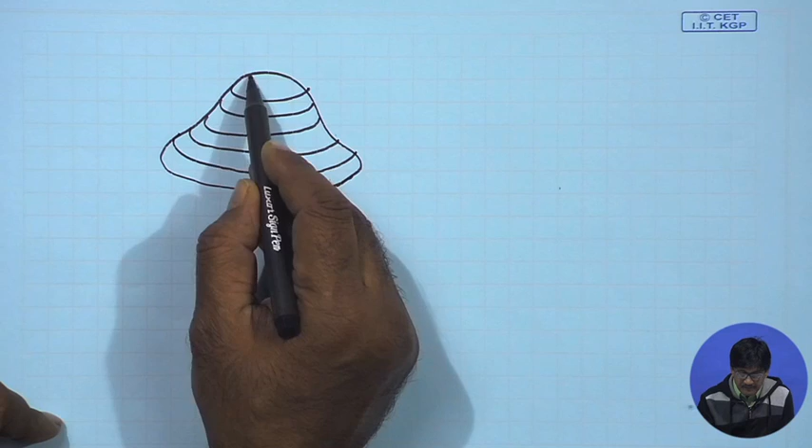So, I will be cutting it into layers. I mean, I will make a CAD model and I will cut it into layers, and then I will be forming. I will be trying to physically realize these layers and stick them together and get this job.

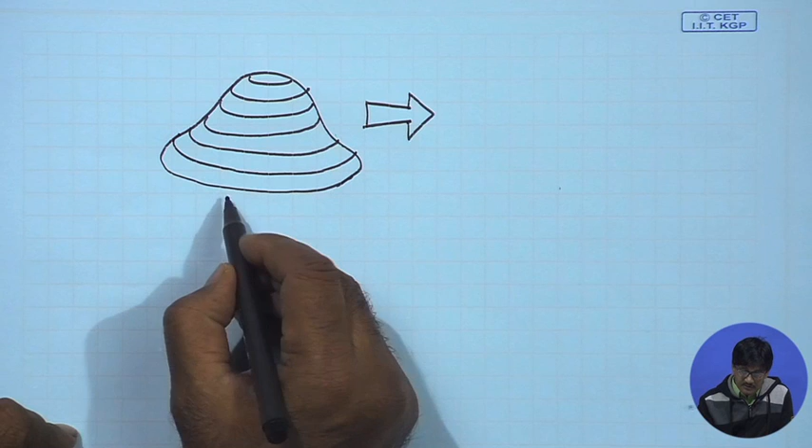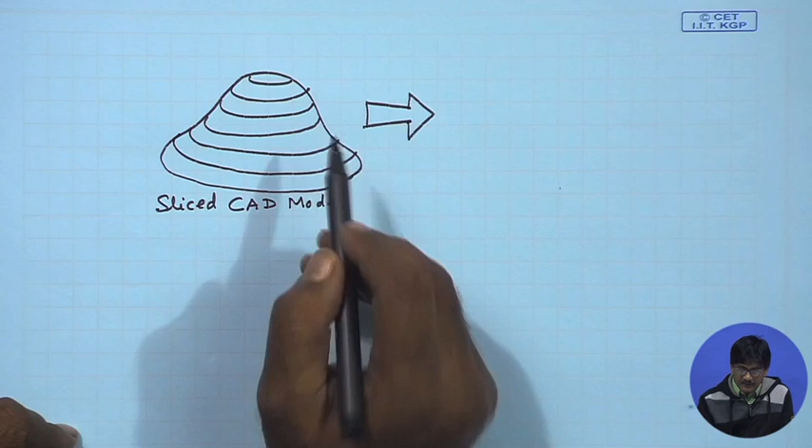So, this is virtual CAD model. I will slice it. So, sliced CAD model. These slices I now try to realize physically. How can I do it? Generally, when they are realized, they come with an approximation. What is that? That is called zero order approximation.

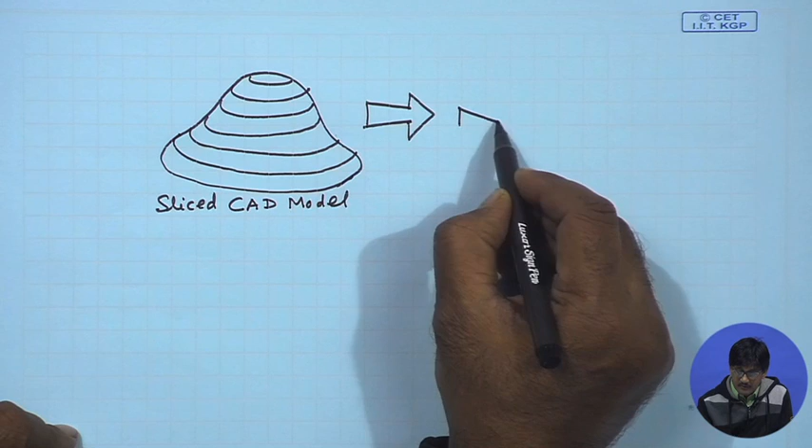Some cutter has been used to cut this out of a sheet of material or a plate of material. It looks like this. Now, you can immediately point out two defects here. One is that these are straight cuts, okay, that really cannot be avoided in case of CNC technology. Straight cuts, most of them. You might be able to remove some of them by curvilinear paths if they match, but some sort of approximation has to be tolerated.

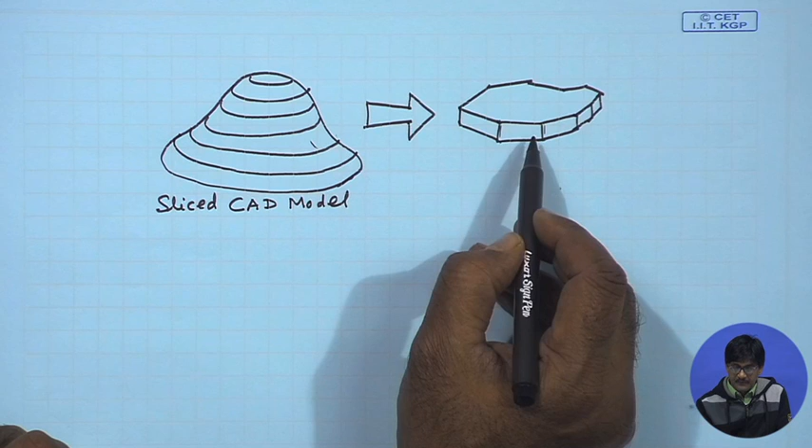But yet another tolerance which we are seeing here is that these walls are vertical while these walls are inclined, inclined and curved, and these are straight and vertical. If we have a 5-axis water jet cutter, in that case we can develop something of this type. These will still perhaps be straight, but these can be inclined. So, water jet cutting will allow us to cut this sort of a layer in which we are simply using a 5-axis water jet cutter.

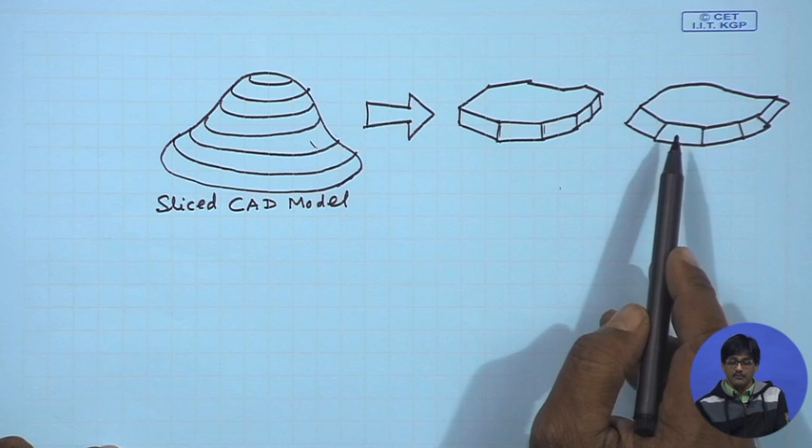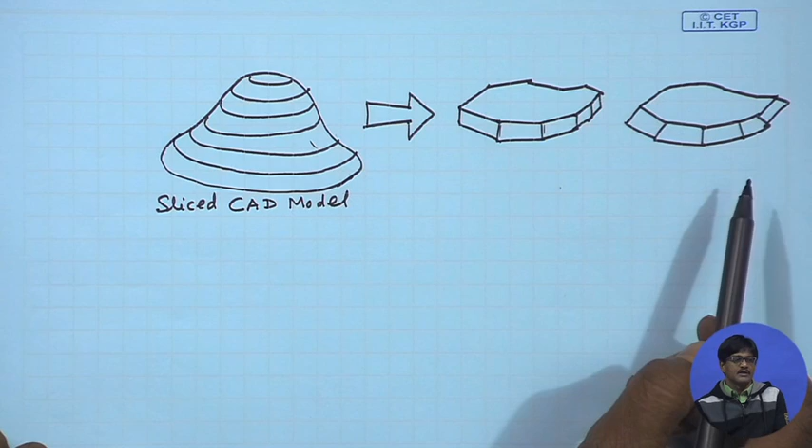Of course, in the same way we can use other cutting heads like laser cutter. And if technology is good enough, we can use a wire EDM also. But these cutting technologies, abrasive water jet cutting, proves to be a very good member in this particular group. So, in the same way, profiled edge lamination tooling, we can also employ a water jet cutting device in order to realize these layers. So, this is by way of application. There are other applications also. We will be going through a detailed discussion on the applications later on.

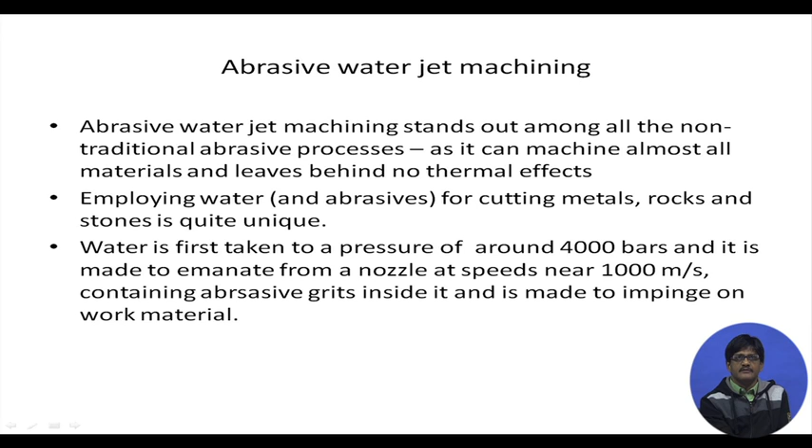Let us have a look at the machine. What does the machine consist of? First of all, it is understood that we have to develop a very high pressure of water. 4,000 bars is really not a very low pressure indeed. So, we pump and intensify the water to a very high pressure. How we do it, we are going to come in the next slide, but let us first try to understand the overall idea. Once we have developed the pressure, we accumulate the water at a very high pressure to remove pulsations in the pressure.

That means, if we are using say a reciprocating device, this reciprocating device will develop the pressure, recede, develop the pressure, so on and so forth. So, that there will be pulses of high pressure in the supply line. In order to remove that, just like a flywheel removes surges in energy, in the same way, we can get the water to accumulate at high pressure in a reservoir, which will be removing such pulsations in pressure.

After sufficient pressure has been developed, we can let it out through a very small orifice here. This orifice allows the water to come out at this particular point. What sort of diameter are we talking about? We are talking about a diameter of say 0.2 to 0.4 millimeters, that means 200 microns to 400 microns. Such a small orifice drilled into say some jewel, that means a very hard stone. So, through that particular orifice, the pressure is released, and for all practical purposes we can assume that it comes out into atmospheric pressure, so that the whole pressure head gets converted to velocity head.

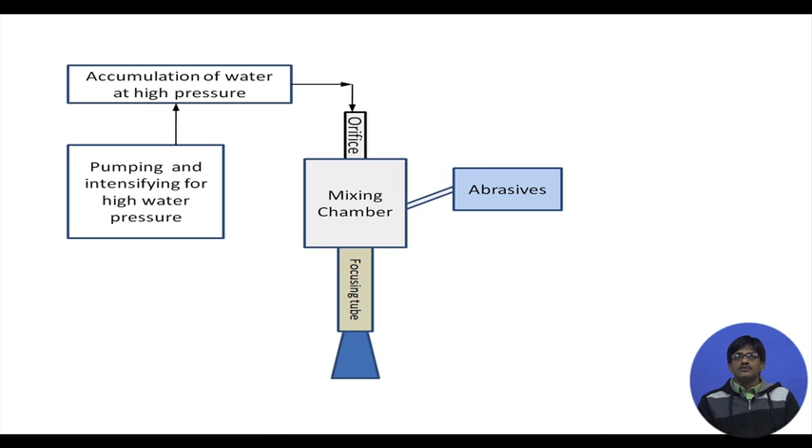Atmospheric pressure is existing there, and in the mixing chamber, through the orifice, water is coming out through a very small diameter, and abrasives are getting drawn into the stream of water, and therefore mixing is taking place, and finally the abrasives take up the energy in the focusing tube, and ultimately it is coming out together.

So, initially the water has to be pressurized, and this sort of a device is used. What is this? Water is here in this small confined chamber. At present its pressure is not very high, but pressure can be built up by this device. There is a large piston here, and this large piston is connected to a rod. This shaft connects these two cylinders. This cylinder piston cross section area is very small, and their ratios might be 50:1, 40:1. So, suppose this sectional area is 50 times that of this particular section.

Water is filled inside, and say at 100 bars pressure we apply pressure on this side, so that this piston is getting pushed towards this side. So, 100 bar pressure multiplied with the area, let us call it A1. A1 into 100 bar will give us the force with which this piston is getting pushed. So, it transmits that force towards this side, and again this force is applied on this piston on this side.

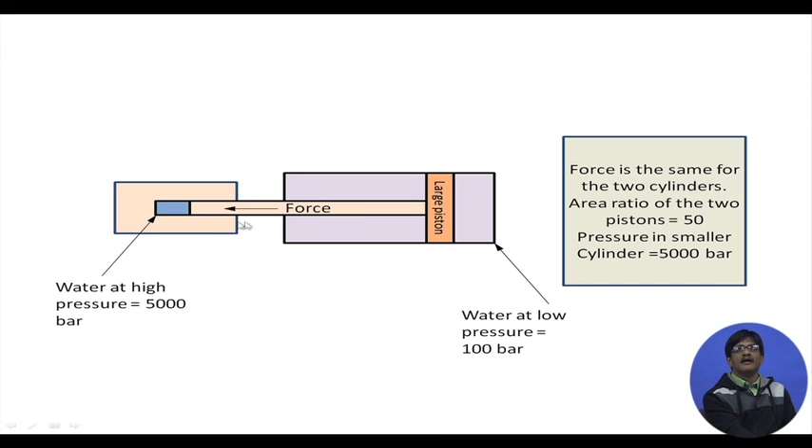So, when the pressure is being created at this end, the force which was developed gets divided by a much smaller area, 50 times less, and therefore it gives rise to a much higher pressure, 50 times higher, due to this area difference. Because 100 into A1 divided by A2, where A1 by A2 is 50. So, 50 into 100 occurs here. Much higher pressure is created here by this simple system.

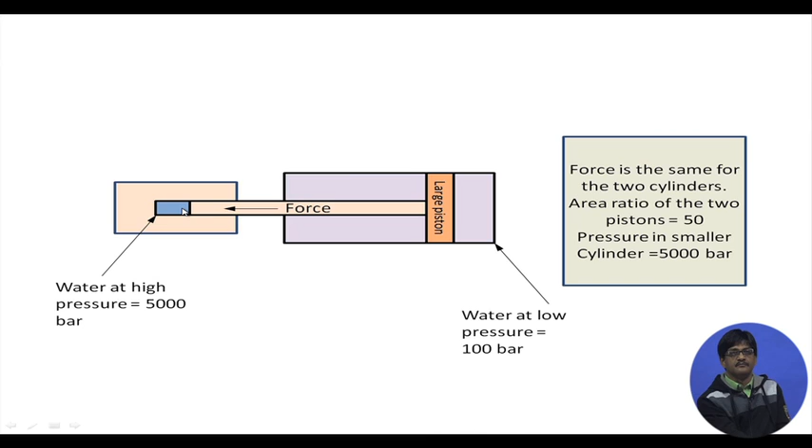Let us now have a look at the basic schematic of the supply of high pressure water. First of all, the hydraulic power pack with a direction control valve is responsible for putting in pressure. The water coming out of the hydraulic power pack, say at 100 bars, comes here, and it is the same thing we saw, with the difference that it presses to this side, and on the return stroke it presses upon this side. There are two similar cylinders on the two sides, and the water, now at very high pressure, is delivered to a central reservoir called the accumulator.

So that it is not just pulses of high pressure occurring at regular intervals in time. Roughly, we have more or less uniform pressure with respect to time. Once the stroke is taking place on this side, we have a pressure increase and supply to the accumulator at high pressure. Then the return stroke occurs when the direction control valve has switched the supply and the discharge to the sump, and this starts moving towards the right hand side, and water supply takes place at high pressure from this point.

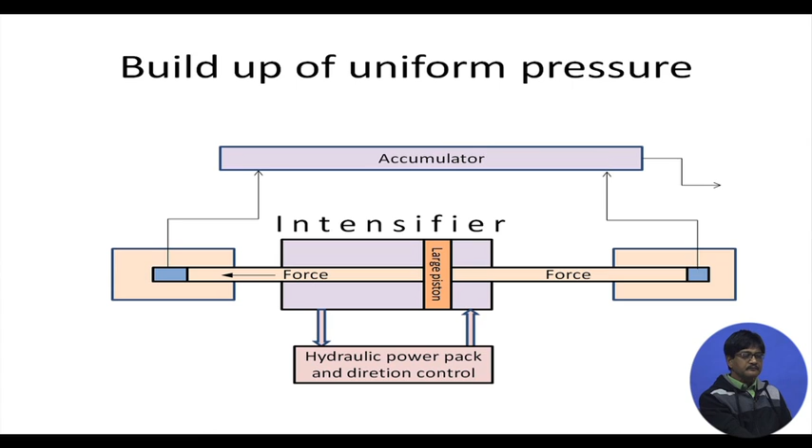So, this way we are removing the effect of surges or pulsations in the high pressure being developed, and from the accumulator this water is sent towards the mixing chamber. As we discussed, the high pressure head of the water is ultimately converted to velocity head by passing the water through an orifice. So, let us look quickly at the conversion.

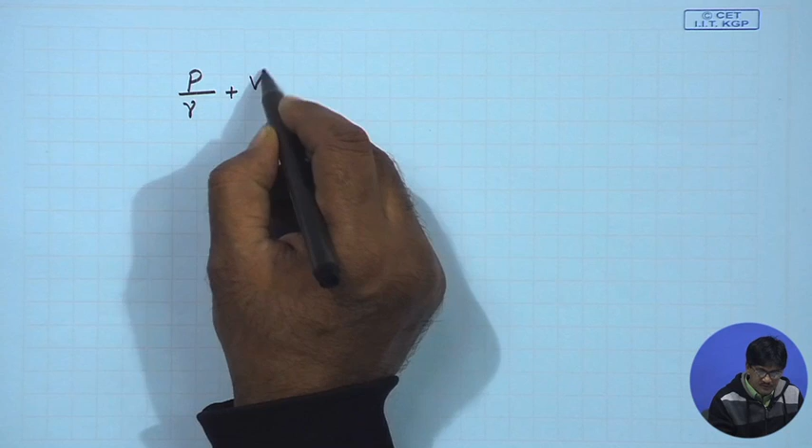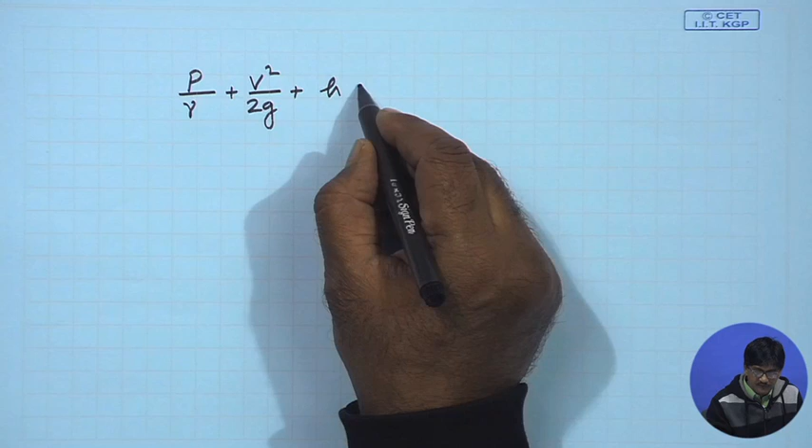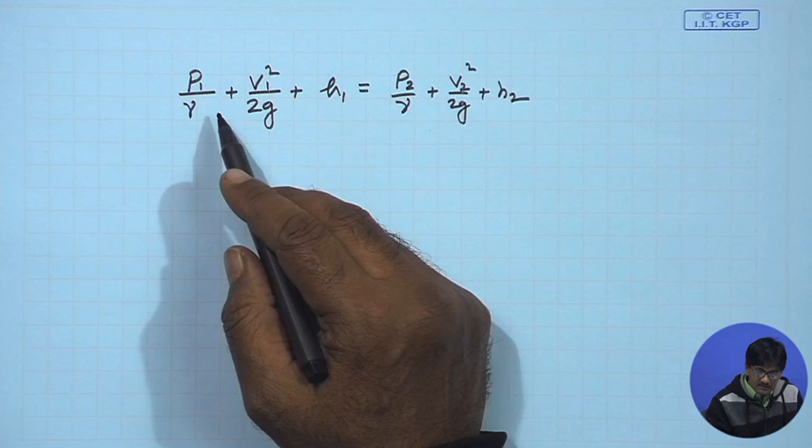The velocity which can be developed is calculated as v square equals 2 p by rho. Why? From Bernoulli's equation, we have p by gamma plus v square by 2 g plus h: pressure head, velocity head, and height. This will be equal, at another position, to p2 by gamma plus v2 square by 2 g plus h2. We start from a place with no velocity, at the same height, which is called stagnation. The water starts from stagnation and only the pressure head exists.

This happens when the accumulator lets out the water to expand to atmospheric pressure. So, p1 by gamma, where p is that high pressure, is equal to v2 square by 2 g, the velocity obtained when the water comes out at atmospheric pressure. At atmospheric pressure we consider gauge pressure to be 0. So, this is the velocity we get. V square by 2 g equals p by gamma, and removing g from the expression, v square equals 2 p by rho.

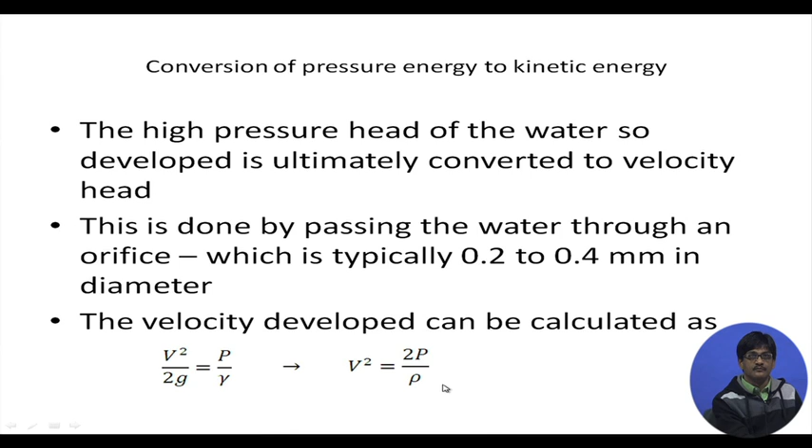So, this thing we have already discussed. So, I am skipping this one.

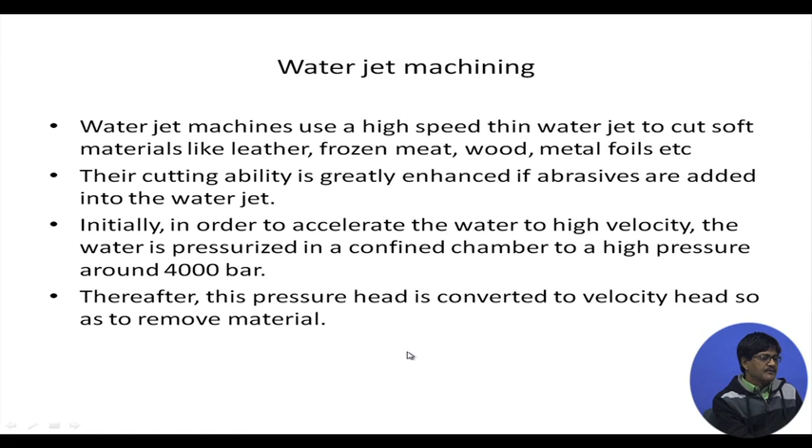So, let's quickly have a look at the calculations. What does it read? It is a problem in case of water jet machining. What is the velocity of water that would emanate from a tank at 4050 bar pressure? The outlet diameter of the nozzle is 0.3 millimeters. The density of water is 1000 kg per meter cube. 1 bar is given to be 10 to the power 5 pascals.

So, we start with our original expression. What was that? P by gamma is equal to v square by 2 g, or v square is equal to 2 p by rho. So, once we put in the values, we are going to get an estimate of the velocity. Mind you, up till this moment we have not put any abrasives inside the water stream.

So, let us see what we have done. First of all, the pressure is 4050, and we have converted it to pascals. So, we have 10 to the power 5 here divided by the density of water, that is 1000 kg per meter cube, and after calculation the velocity of water is coming out to be 900 meters per second. So, with this velocity of water, you can do a lot of cutting,

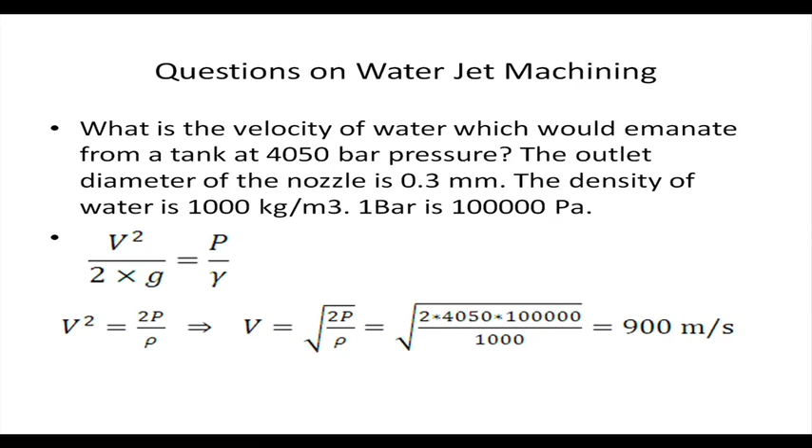Say it's a very tall building, say Burj Khalifa, in the Middle East. It is most probably around 900 meters high, if I am not wrong. Hopefully, I am correct. So, if you use tap water with the tank at the top floor, then find out whether you are going to attain the velocity in the range of typical water jet machining velocity, so that you can go on with the demonstration. Find out.

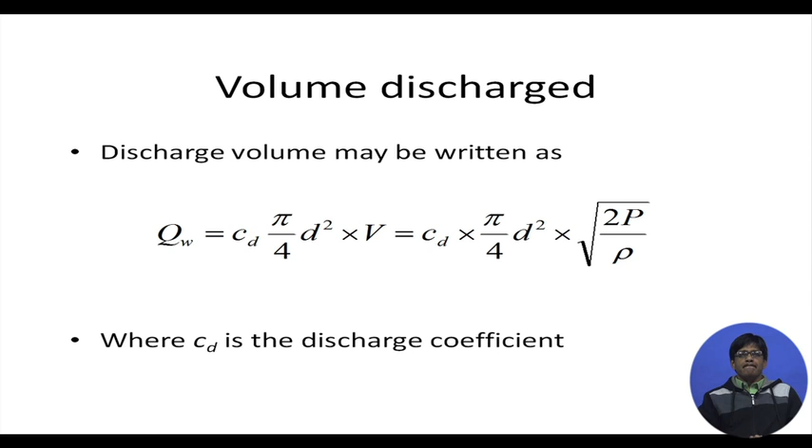Let me anyway continue, since I have a few minutes, with 1 or 2 points from the next lecture. So, that particular problem you can find it out. First of all, it is your duty to find out the height of the building. I do not remember it, I think it might be 828 meters. So, you can put V square by 2 g is equal to h, and therefore, V square is equal to 2 g h, and from that your velocity will be coming out.

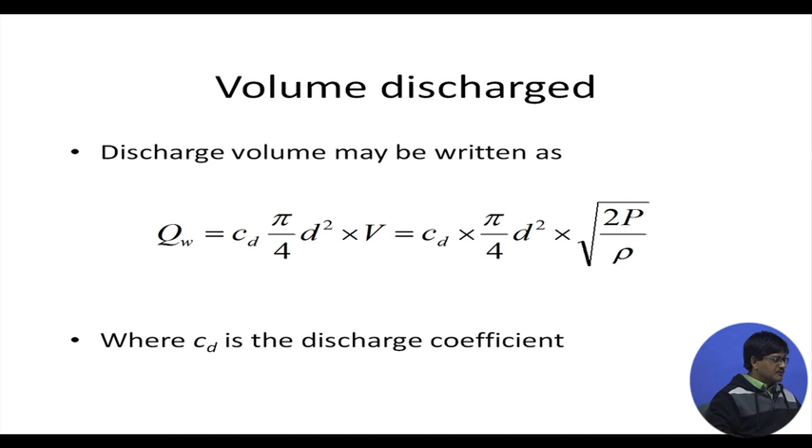And in fact, we can have a quick try at calculating it ourselves. Give me one moment. Do we have Excel here? Let us see quickly. That is right. So, let us try out the calculations ourselves and see what sort of results we are getting.

So, V square is equal to 2 g h, that is good. So, this is equal to the square root of 2 multiplied by 10 multiplied by, let us make it 900, and the velocity is only 134. So, therefore, it is absolutely impossible to demonstrate the working of water jet machining using tap water at the ground floor of the tallest skyscraper in the world. You have to have some pressurizing equipment.

And also, we have not considered the tremendous amount of losses which will occur due to flow of water from the top floor through pipes up till the ground floor. That will take half of your energy away, so that you cannot really carry out machining with tap water in any case. Okay. So, let us go back. Yes, we will just have a quick look at this and then stop.